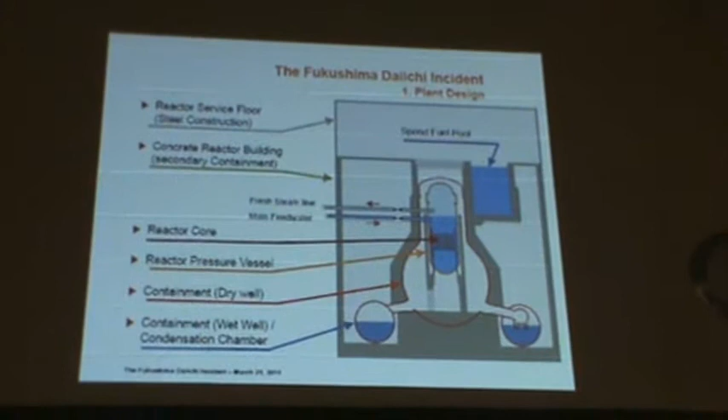I'm going to quickly go through some of the boring stuff here, but this is basically what the Fukushima plant looks like. It's also very similar to the Susquehanna plant, the 2-unit boiling water reactor up near Berwick that I work to support. It's also similar to the Limerick plant - if you go down Route 100 you'll go right past it in Limerick, Pennsylvania. Also on the Delaware Bay there's the Hope Creek plant, very similar in design to this.

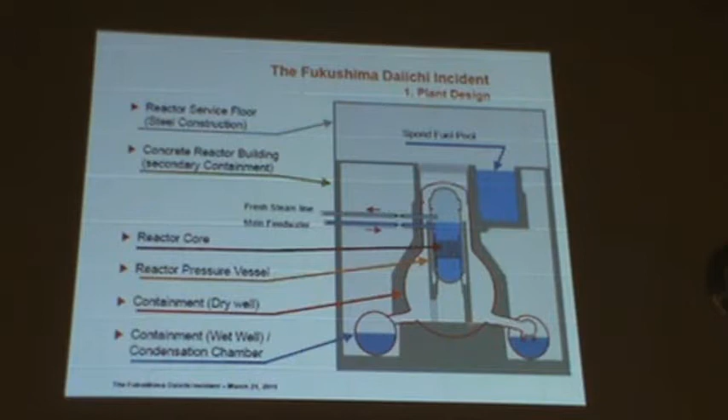We've got the reactor core sitting inside of a pot that's inside of a thick-walled steel reactor vessel that contains all the water surrounding the core, and it's enclosed inside of a concrete and steel containment structure. This is just to illustrate that there are multiple barriers between the core, where all the uranium is, and the outside world. We've got multiple barriers and multiple ways of getting water into the core here. I'm expecting you all to take good notes, there's a lot to get through, so save your questions for later.

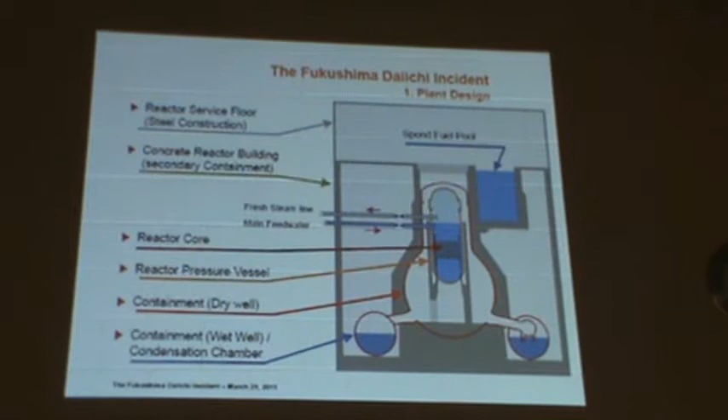Okay, Paul? All right, fission is what we live for. The uranium atom is sitting there minding its own business, perfectly fine.

You can pick up a new fuel rod, and you can handle this stuff, no problem at all. Until along comes a speeding neutron.

You may recall that the atom nucleus consists of neutrons, which are the gray dots, and the red dots here are protons. It's all kind of held together in this great big mass of protons and neutrons. The number 235 means there's 235 of them in there.

It sucks up one more neutron, becomes uranium-236, and becomes unstable and busts into two smaller products we call daughter products, because they reproduce themselves. They will continue to decay and produce more and more products, but these are the leftover chunks of matter after you get the fission here.

Well, the other thing that happens when you have a fission, which is what you call it when an atom breaks apart, is it liberates a couple more neutrons. And if you're not careful, or if you're designing it that way, you can see what happens. One neutron then becomes two neutrons, and two neutrons encounter two uranium atoms, and if you allow that to progress geometrically, you can have quite an interesting result. The way we design our cores, this doesn't happen.

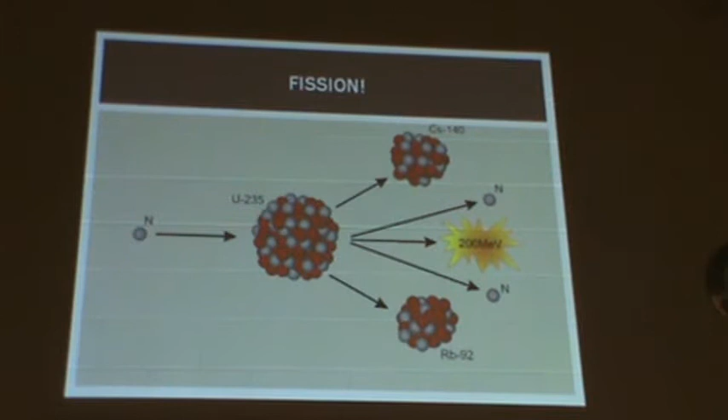Okay, Paul? Okay, this is a fuel pellet. Like I said, you can handle a new fuel pellet. This is a fuel pellet in production. It's all the size that an individual pellet is. It's just a tiny little thing.

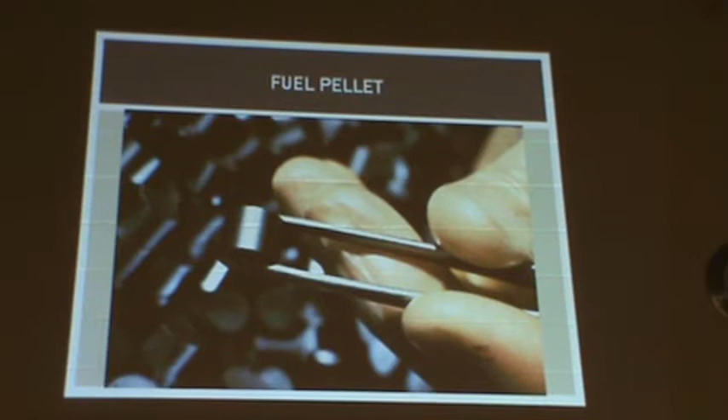Then we take these things, we stack them up inside of tubes, and this is a typical fuel bundle for a boiling water reactor. This shows 4 of them here, and one is cut away in this diagram. Each of them has a series of tubes that are all held together in parallel inside the core. Each of these tubes is just a stack of those pellets that we saw a second ago.

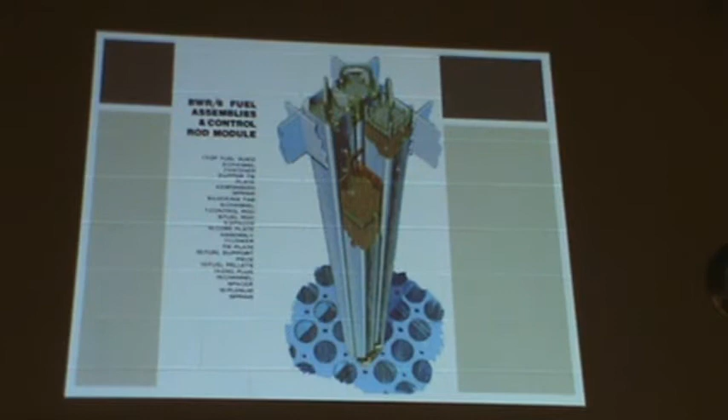And in the Susquehanna core, there's 764 of these bundles. Each of the bundles is a 10 by 10 array, and it's about 14, 15 feet long. So that's how much raw uranium and other stuff is in there in terms of pellets. So that's what we're dealing with.

This is, Paul said, I've spent much of the last month looking down into the reactor. This is what I saw. You're looking down here at the reactor core itself.

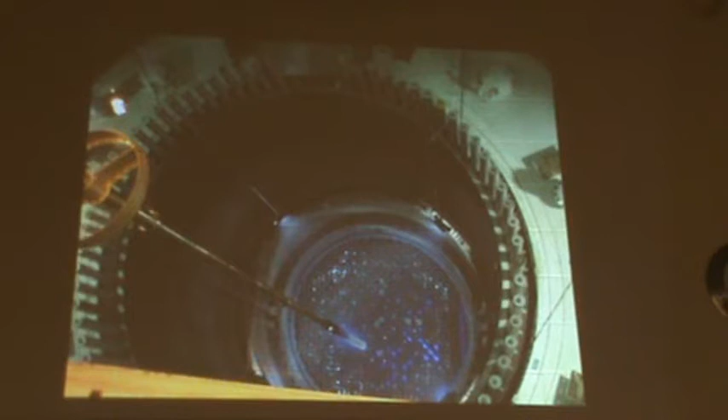All right, this is a used fuel bundle, and it's being pulled up and taken out of the core and put into the spent fuel pool for long-term storage. So it's got this beautiful blue glow. That's called Cherenkov radiation, and that's where you're actually seeing the light given off by one of those electrons shooting out from the core. It's actually slowing down while encountering the water surrounding it, and in the action of slowing down, it gives off this beautiful blue glow. So that's not a light down there, that's the actual core itself glowing that way. So when you talk about nuclear glow, that's it.

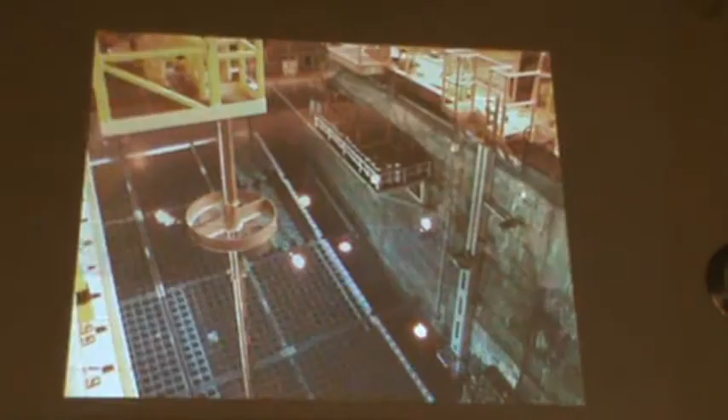Okay, next, this is a spent fuel pool. They pick that bundle up, haul it over, and set it down in this array, sort of an egg carton kind of thing, maybe more like a beer case. You're just setting it down in there. This whole pool is probably about half the size of this room. If you divide this room in half, this whole thing here would fill us up, and it's all full of water.

Okay, next, all right, this is the Fukushima plant in Japan. This is how it was prior to March of last spring. It has 4 units here, 1, 2, 3, and 4 along there, and there's actually 2 more over here, 5 and 6. So it's right on the coast, and you can see it's got this setup with some breakwaters out there.

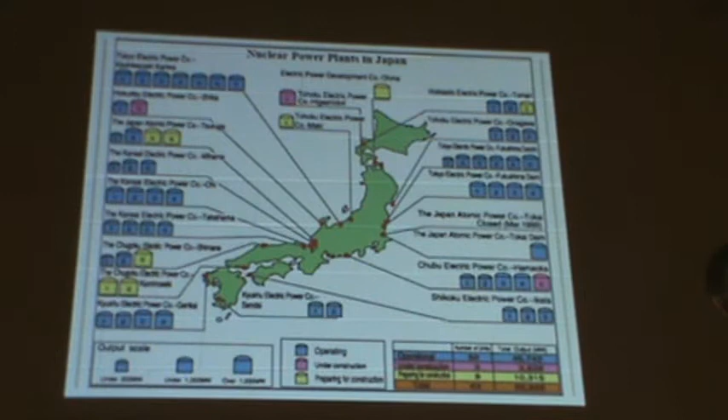It is just some of a large number of nuclear plants in Japan. Japan had gone very much for nuclear power. They have no natural resources of their own for which to generate electricity - no oil, no coal, maybe a little geothermal, but not enough to really make much of a difference for them. So they had launched onto a program of building nuclear plants, and they're all around the island.

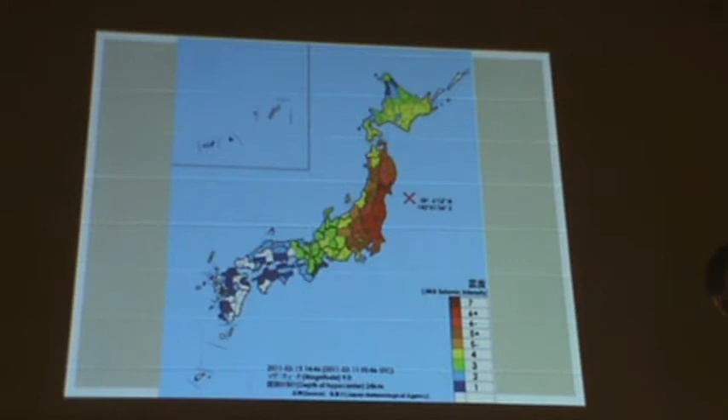All right, so this is where the earthquake occurred. It's the largest earthquake at a Category 9 on the Richter scale, and the color grade shows just what areas are most affected. The Fukushima plants are right down in this area, right here. Couldn't be much closer. So you had a huge earthquake that occurred on this day, and it was devastating to the countryside.

All right, so 11 reactors automatically shut down. In Japan, you have an earthquake, boom, down they go, because they expect earthquakes to happen, and they'll have an emergency shutdown. Again, if you take emergency shutdown, you shut down quickly - do you go to zero in power inside the core? No, you haven't stopped heat production, so you've got to keep pulling that heat away from there.

There were another 3 that were affected in that area that were already shut down. There were 3 of the Fukushima plants, units 4, 5, and 6, were not operating at the time - they were shut down. I've talked to some of the people that were there at the time. The earthquake happened, and they got out of the plant, and they had 2 places they could have gone to - one was their hotel, and one was a closer hotel that happened to be up on a hill. They decided to go to the closer hotel. The hotel they were in didn't last very long.

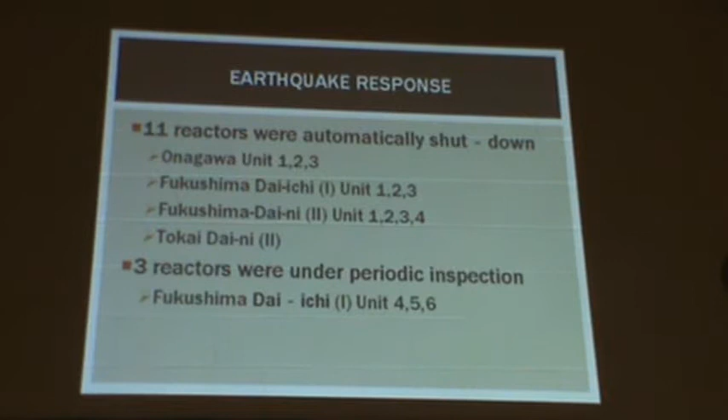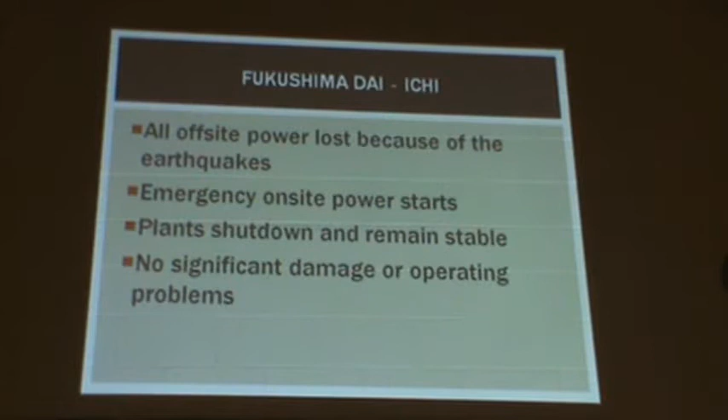All right, so they lost all off-site power. We're designed to be able to take that. If power to the grid goes away, like it happened here locally last October, we have emergency on-site power - a set of emergency diesel generators, basically a diesel locomotive sitting there ready to produce electric power for you. They start up right away and provide the house loads to the essential things to keep that heat being removed from the core. They started up just fine, and the plants were shut down and were stable. There was no significant damage. They hadn't actually walked through the plants, but they shut down as expected, and they were stable and operating in a shutdown state. This is after that huge earthquake.

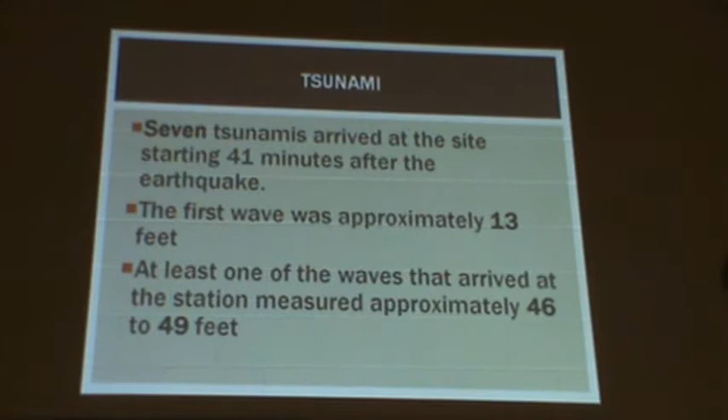41 minutes after, the first of 7 tsunamis hit the site. The first one was approximately 13 feet, and it was blocked by that seawall you saw out there. They can measure that - they have a little tide gauge. At least one of the waves that arrived at the station was 46 to 49 feet. The only way they knew that was they could see the water level marks on the side of the building, because their instrumentation that measured this 13 feet was gone. They were designed for 18.7 feet - that's what they were designed and licensed for.

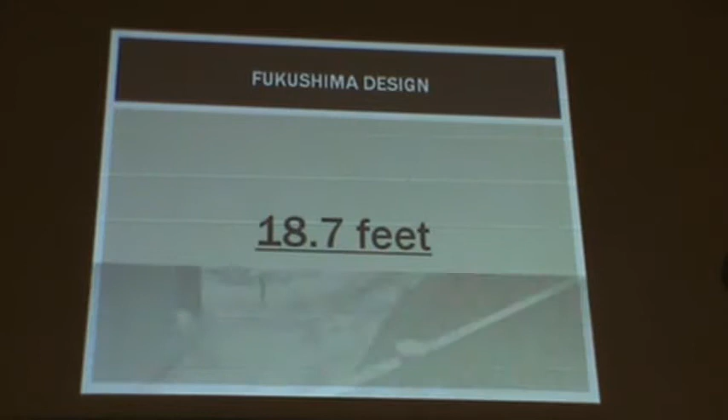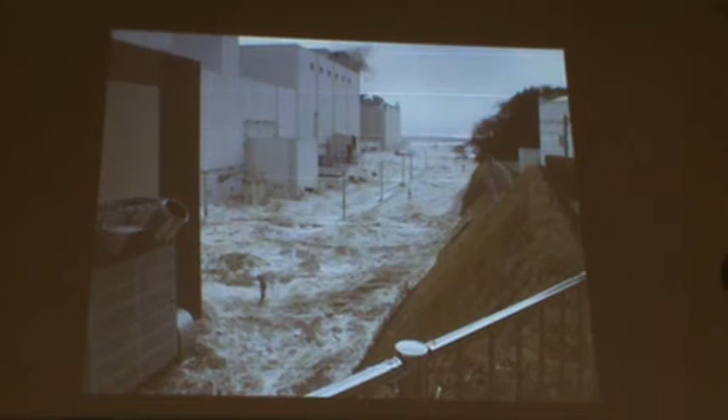This is what it looked like as the tsunami came rolling in. Here's some of those buildings that we saw in the overhead shots. This might be a little tough to see, but it's a good illustration.

You've got the ocean out here, the tidal wave comes in. This is where the reactor is, called the reactor building, naturally. The reactor produces steam, which goes through a turbine, and that's housed in the turbine building.

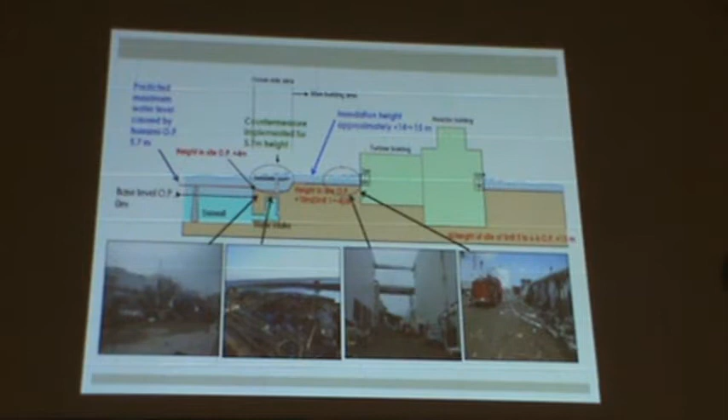You've got to use your imagination, now you're looking at it from the other direction. The ocean is out here, and now you're looking inside the plant. This is the water level here, and here's that reactor we saw in the earlier picture.

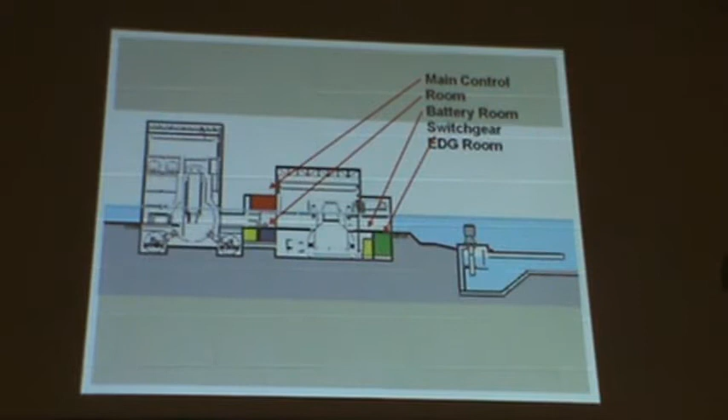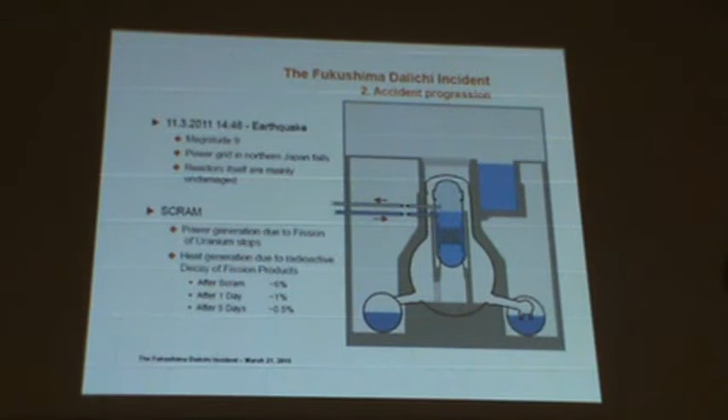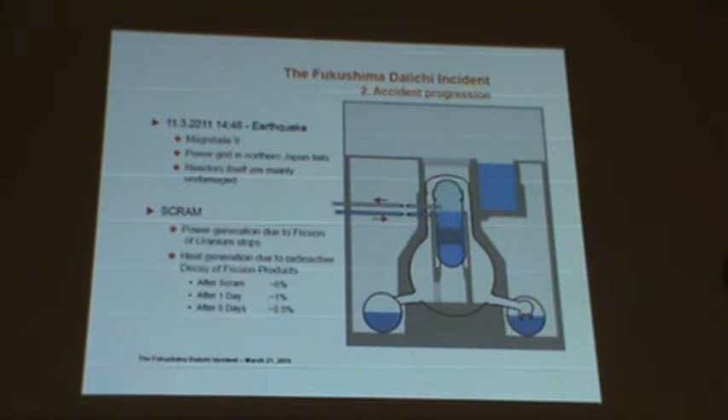If you blow steam into water, the water is going to cool off the steam and it's going to condense, and it keeps the pressure down inside of this, which is kind of like an upside down light bulb - not a curly fry light bulb, but one of the classic light bulbs. Up here is the spent fuel pool - that's what we saw the picture of.

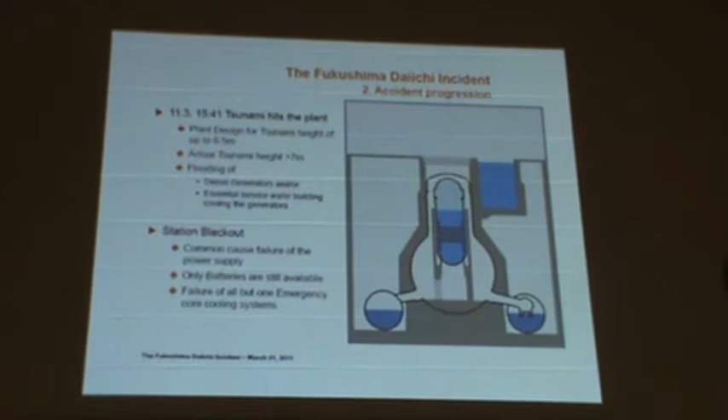So the tsunami comes, you lose the diesels, and now all of a sudden you have no makeup water coming in here. How much power is being produced in there? Roughly 6% of the original. So we're getting hot, and this is all bottled up. If you've got heat in a bottled-up enclosure, pressure starts going up.

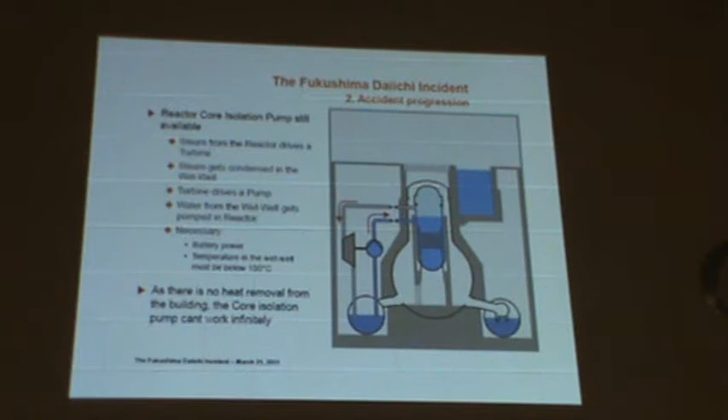So we've got to deal with that. There was a system that can operate off of the batteries that actually takes steam off of the top of the core, and there is steam being produced. It drives its own little turbine and drives a little pump, and it circulates around in here. So it has a self-contained system, and that was fine as long as you have batteries.

Well, as we saw, the batteries didn't last very long. So here we are, back to a hot core and nothing coming in. So what happens here? Well, you start building up pressure, and you've got to get rid of that pressure.

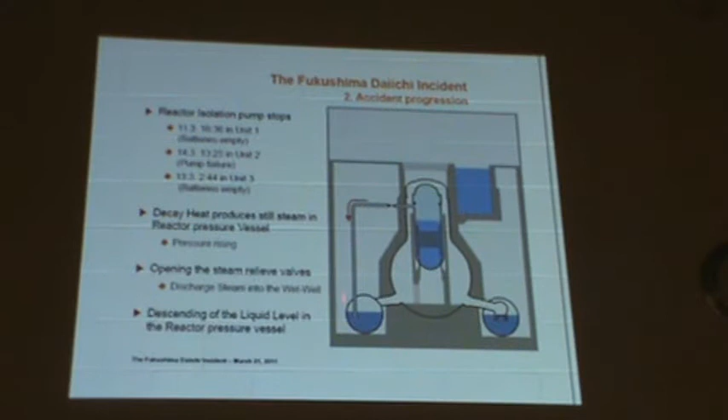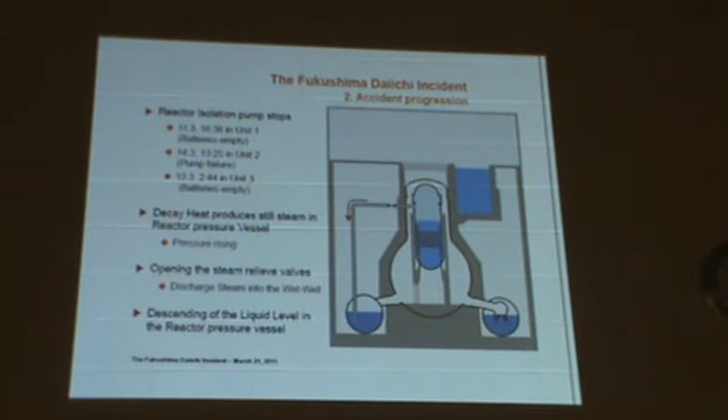So they open up what you'd call a relief valve, and it directs steam down into the suppression pool - this big donut down there that's half full of water - and they're just coping now. They're directing the steam down in here, and we're losing inventory because steam is coming up, but no water is coming back in.

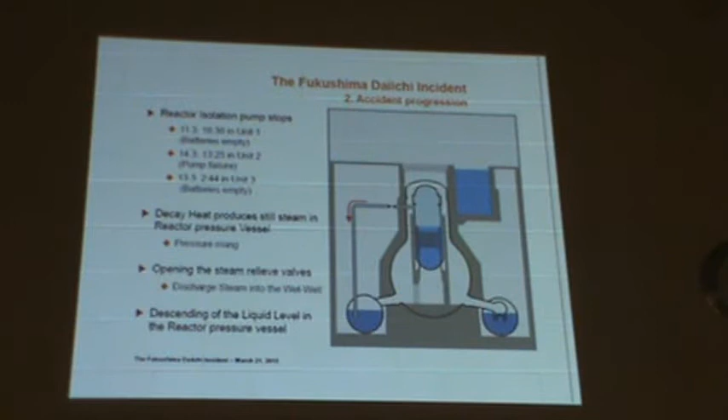So now we're down to the top of the fuel. We keep on going, and what do you suppose is going to start happening to that fuel? It's going to get hot and melt. It starts getting hot.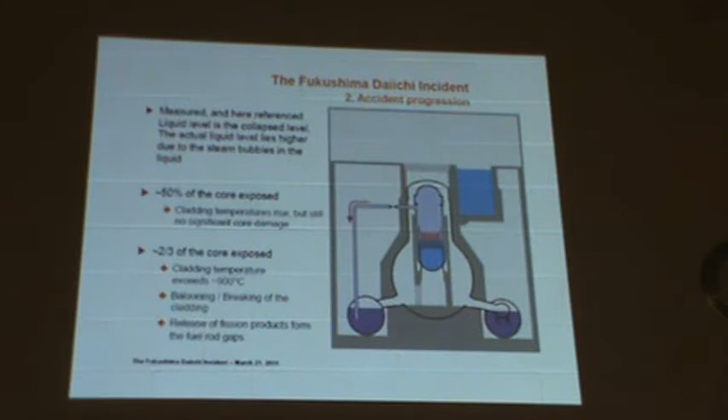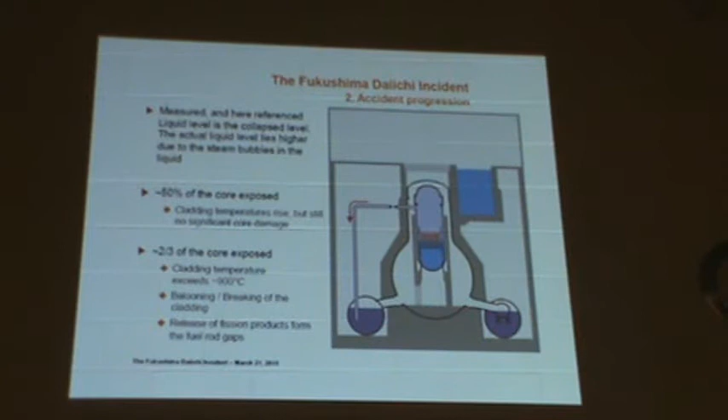Now there's one thing I mentioned about those little fuel pellets - they're inside of a tube. That tube is a zirconium alloy that is great for producing power, and as long as it stays cool, we're great. But when it starts getting really hot, when it gets uncovered, the water that comes in contact with it will actually burn - it takes the oxygen out of the water, H2O, and forms a zirconium oxide layer.

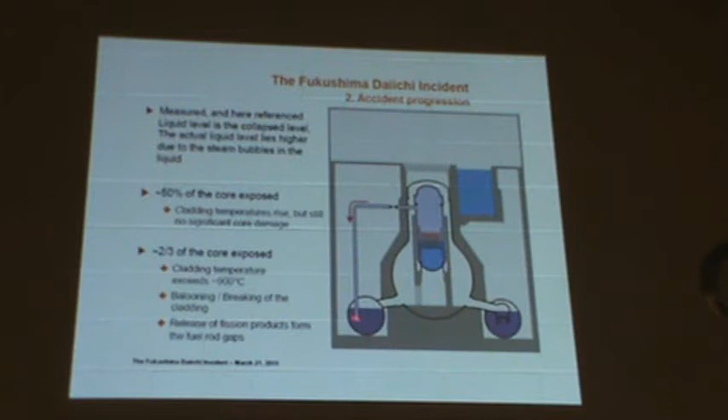And what happens when you take the oxygen away from the water? What do you get? Hydrogen. Hydrogen starts accumulating in here, and it's getting directed down into the pot here. Does it condense in there? Does it stay in? No, it'll just come bubbling back up and be in this area. Okay, so that's the problem.

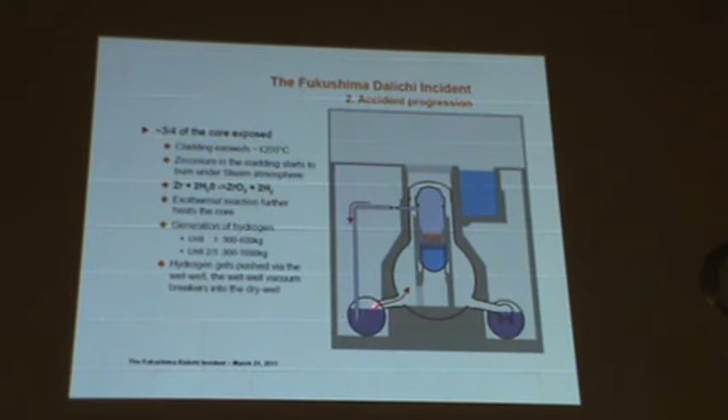And the other thing is, remember those daughter product things I told you about? Some of them are solid, some of them are gas, and the gaseous parts are now starting to get released out here. So you've got all these daughter product things bouncing around, and the steam is carrying some of the particle parts also. So that's coming down in here, and the gaseous stuff is bubbling back up and coming in here. So this whole thing is getting full of hydrogen and these radioactive particles that are supposed to stay inside the core.

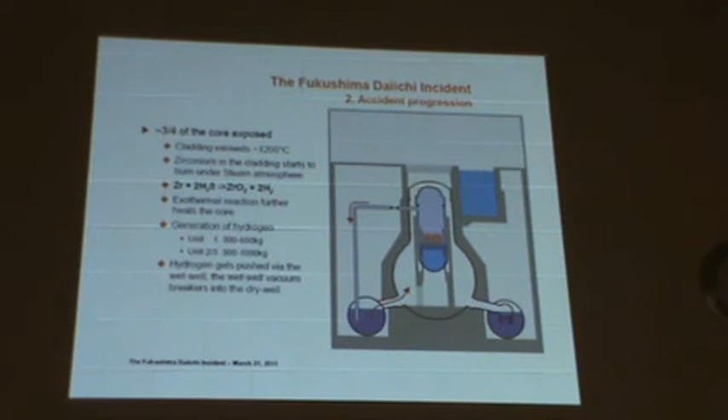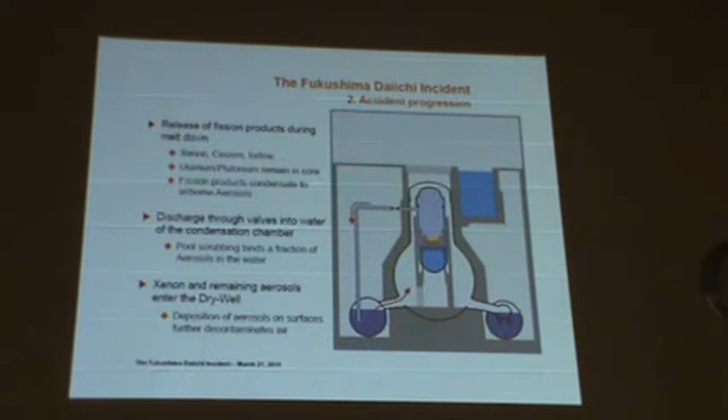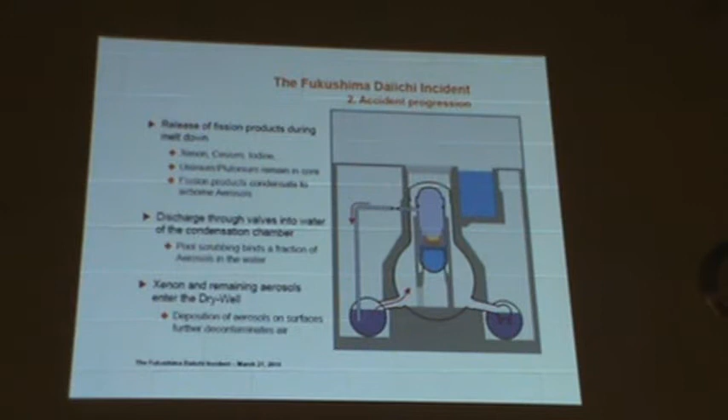Okay, next. Getting hotter, and more of these particulates are accumulating here. The guys in the control room, and I'll tell you what they were going through in a minute, but they're seeing not only is this pressure going up, but now the light bulb is going up in pressure. You got to do something, otherwise it's going to bust.

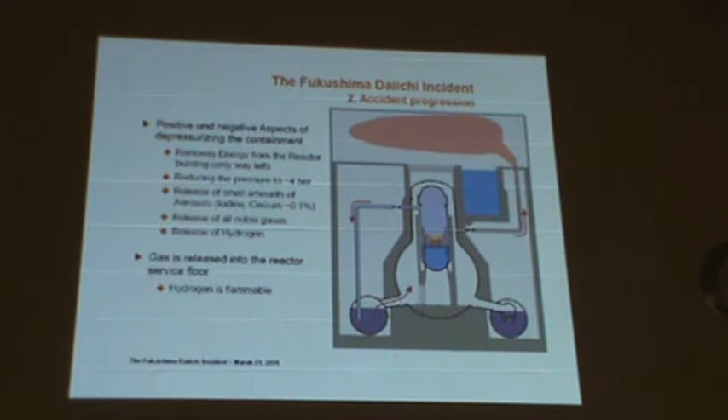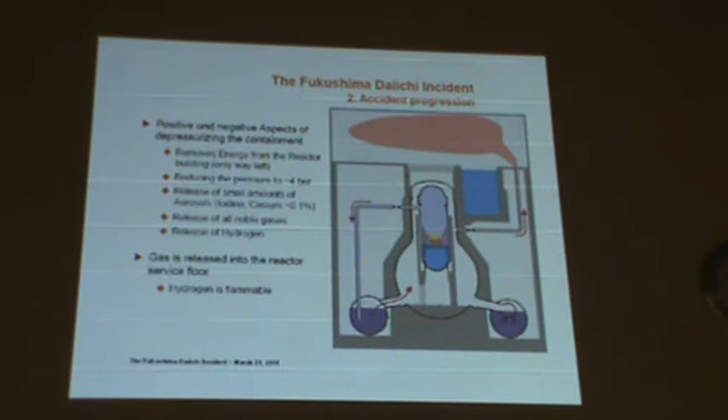Okay, go on. So they open up a vent from the light bulb, and they vented it up into this space up here. Now that space up above is, again, where I spent much of my last month. It's a big old open area that has the machinery for moving the fuel around that we saw in those pictures. Nothing else much up there other than the spent fuel pool is open to that. But now they've released all this gaseous stuff, which includes hydrogen and the radioactive particles, and it's all up in that area, okay?

So you release hydrogen up into an area that's got oxygen, wow, bammo, you get an explosive mixture. Okay, so this is what everybody saw on TV, and this was the result. We got some pictures up here if you want to look later on. I actually flew some drones over the top and could look down inside.

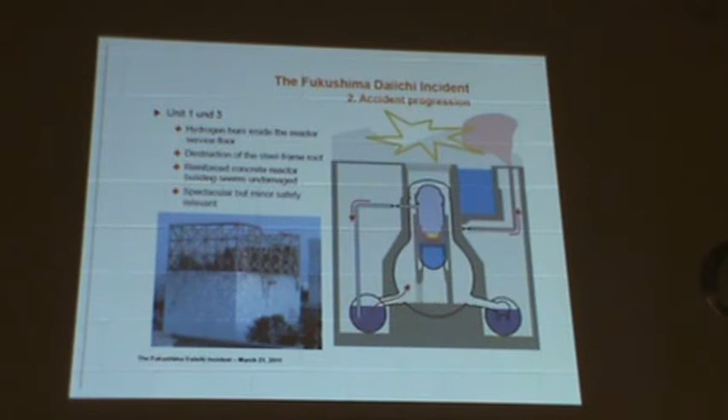Now, anybody tell me what didn't explode here? The core didn't explode. The vessel didn't explode. The primary containment light bulb didn't explode. It was this big open area up top that exploded. A bunch of junk fell down inside. There's stuff that fell into the spent fuel pool. Not a good situation, but that core is still inside of the vessel, which is still inside of the containment structure. We just have this, we have a vent here. Again, not good, but this is remaining largely intact.

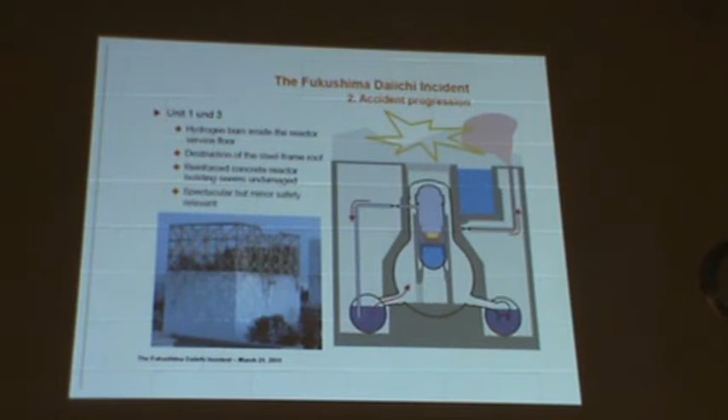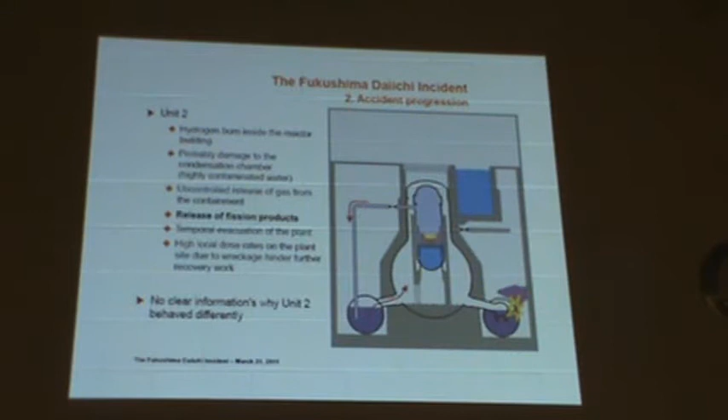There was some thought about one of the units, unit number 2, that the little donut thing had ruptured, and from this presentation that I got a little while ago, that was still the operating thought. Recently, in the last couple of weeks, they actually sent a robot into this area, and it went all the way around the donut there and found that it was fully intact. So they're trying to explain why there was a big noise there, but there were explosions going on next door, so that's probably what they were hearing. So if you hear that one of the vessels or one of the containment structures ruptured, that is not true. So this did not happen.

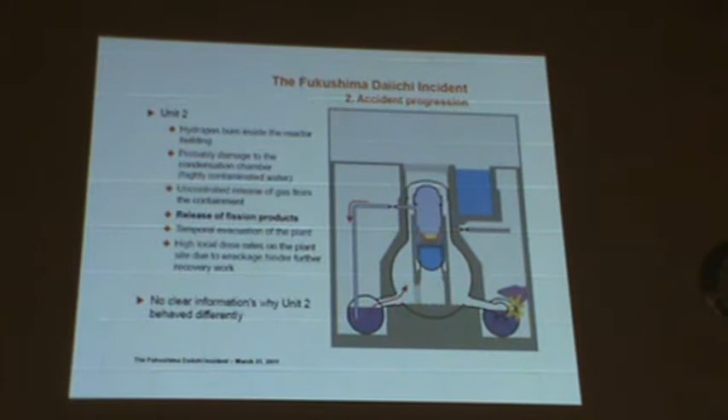All right, next. Eventually they did manage to get power back, and they brought in fire trucks. They brought in all kinds of things and pumped in seawater and managed to get the pressure down and get water back in. So that's the current state now. It has been recovered and it has been cooled, and the operators do believe that they've got things under control now.

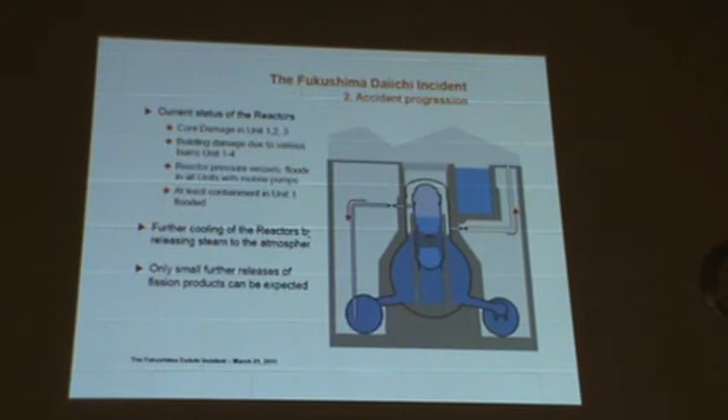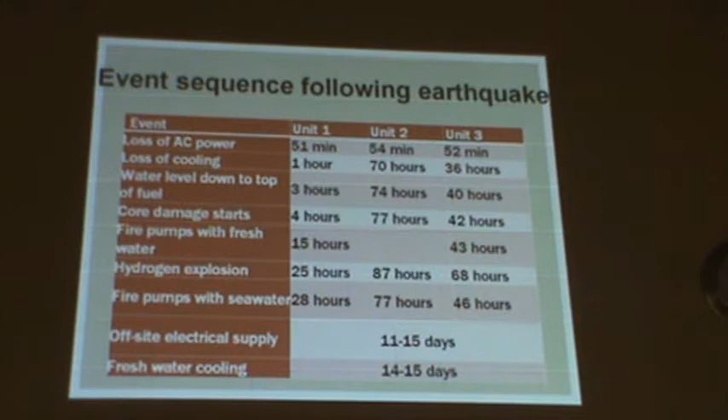All right, this is just kind of a timeline showing the three operating units, how long it took for loss of power. It all happened about the same time. Core damage started in Unit 1 at 4 hours, Unit 2 at 77 hours, Unit 3 at 42 hours. They all had their own reasons why it took much longer in some than others. Fire pumps came in with fresh water at 15 hours here, 43 hours there. Again, just a matter of how you got in there and what you could do. Hydrogen explosions happened at these different times. Off-site electrical supply came back anywhere from 11 to 15 days. So they lived without electric power for darn near 2 weeks.

You also have heard about that spent fuel pool, again up at the top there, that there was damage up there, and that's also something that they found now is not the case.

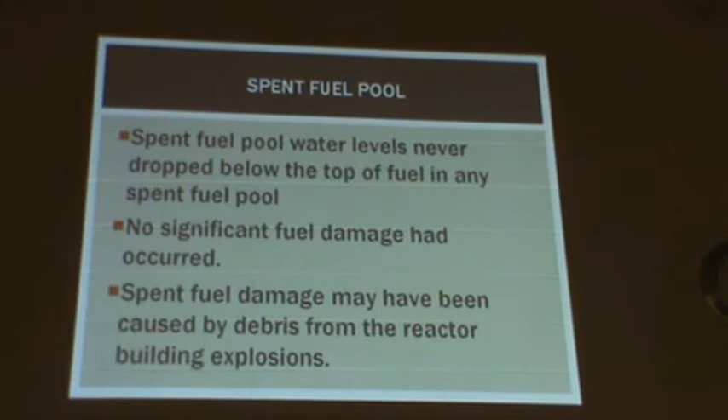Fuel pool water levels never dropped below the top of the fuel in the spent fuel pool. The fuel was still hot, so you had to keep water on it. Thanks to fire trucks and having the lid blown off, they were able to keep water over that large spent fuel pool, so no significant fuel damage really occurred. There may have been some damage when the roof caved in, but it was impact damage, not overheating.

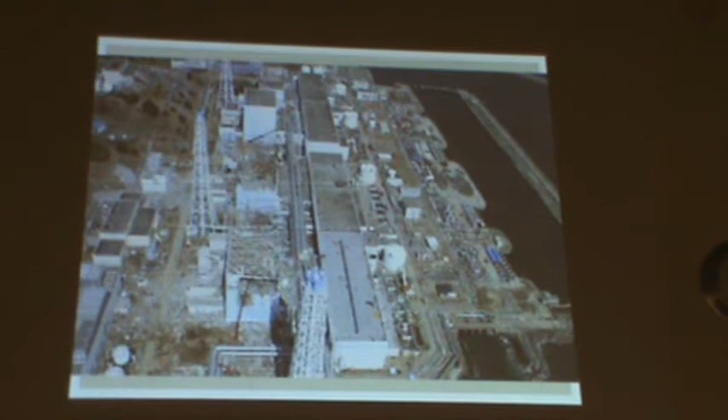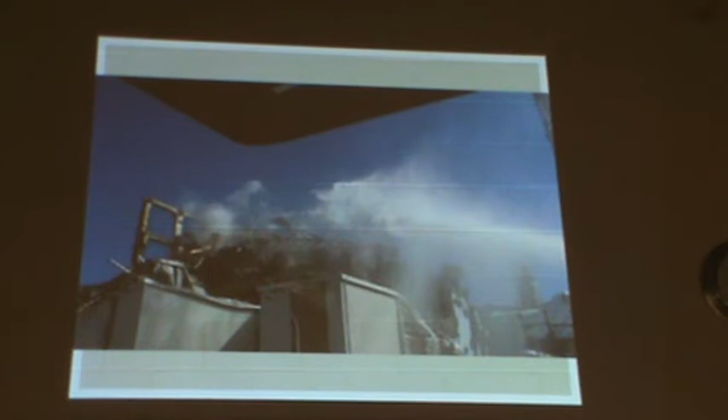I told you about getting water into a spent fuel pool. Here you've got the lid blown off of the reactor building, that big open area at the top, and here's a fire truck squirting water up there. They're just dumping water in any way they can. They also had cement pumpers - if you ever wonder how you get cement up in a real high area, they've got pumper trucks that will pump that stuff up, and that's what they used here as well.

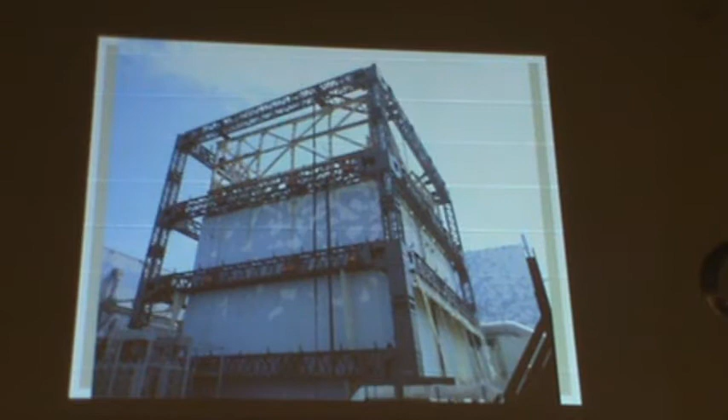What they're doing now is building a sarcophagus around it. They actually built this structure around each of the damaged units, and they're putting up these panels. You can see them lifting it into place here, and they're enclosing it so it's not open to the environment any longer. You can see here it's almost done, and they're putting a lid on it as well.

You can imagine you are the plant operator. There's dozens of operators, but the control room operator, the team of people in charge of keeping things running and keeping that core covered, they're in here and all lights are out. All you have is some emergency lights, and those don't last long either. They're wondering, what do we do?

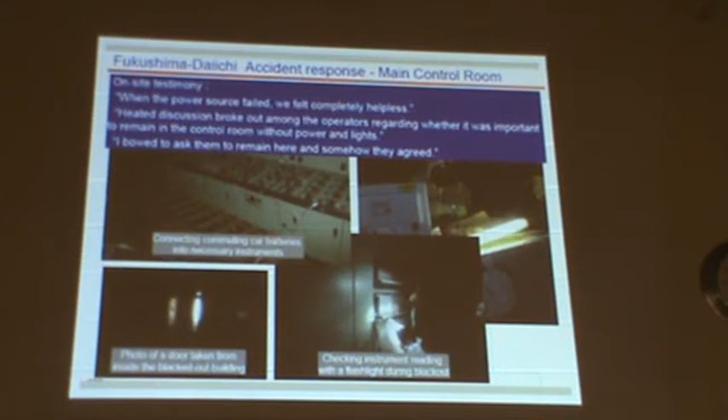This is an interesting quote from somebody's testimony from the control room: 'When the power source failed, we felt completely helpless. Heated discussion broke out among the operators regarding whether it was important to remain in the control room without power and lights. I bowed to ask them to remain here, and somehow they agreed.'

All right, releases. Who was here for the Three Mile Island accident? Not a pleasant time. Well, there were releases from Three Mile Island, and don't worry about the units, but 481,000 terabecquerels. Fukushima, four damaged units, 630,000. Chernobyl, 5,200,000.

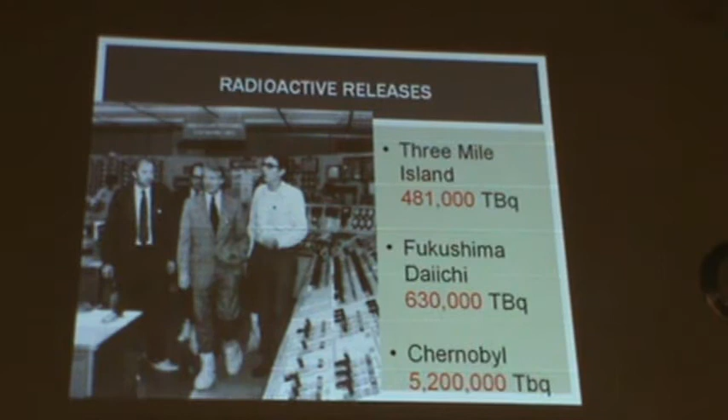So if we put it in a little bit of perspective, yeah, a bit more than Three Mile Island. Anything that really happened from Three Mile Island, health-wise? No, not really. So this is maybe 20% more or so, but not dramatically higher. And you saw the guy with the boots on.

All right. You and I and everybody across the fruited plain get approximately 3.1 millisievert, whatever that unit means, of radiation just from living. If you live in Denver, you might have 5. If you live in Rhode Island, you might have 2. It depends a lot on where you live, and your basement is like here. Well, and yeah, if you live in the Reading Prong, you may be 10. But it's highly variable, and we all live with it.

So they checked 10,000 people living near the Fukushima plant, and more than half of them got less than 1 out of the whole deal. 4,000 some got between 1 and 10, and a few got a bit more, but still nothing really dramatic as far as exposure to the general public.

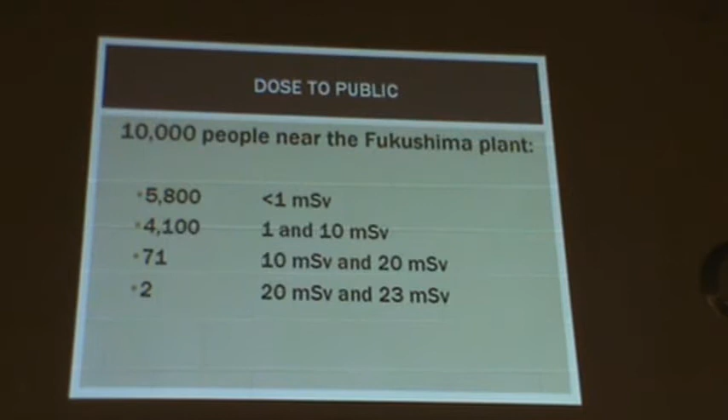So, what are the consequences? A 0.002% increased risk of cancer, and a 0.001% increased risk of death from cancer as a result of these releases. So, after all that, other than Chernobyl, I can't think of a worse thing to do to a nuclear plant.

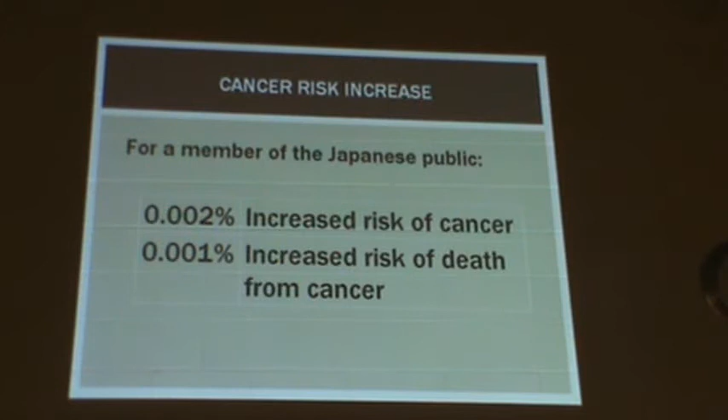After all that, here's our total consequence. Of course we have to express it in terms of percent of risk because you never know. If you have 10,000 people, you might be one person out of that 10,000 that succumbs to cancer because of it. There's no way of knowing, because there's potentially a great many of them, so you're just increasing the odds. The biggest health risk is obviously the psychological trauma and evacuation, and you're months away from home.

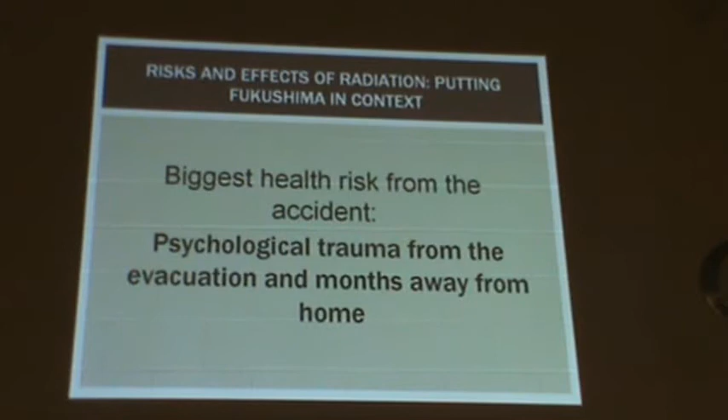This is really devastating to most of the people. There are vast areas that are not inhabitable right now. You can't go back. There are some areas that they're letting people come back to, and some that you can't. A large part of why there was so little exposure was that they did have time to evacuate. And if you can imagine, you're dealing with a tsunami, in the aftermath of a tsunami, and you've got to get all these people out. They were able to do it.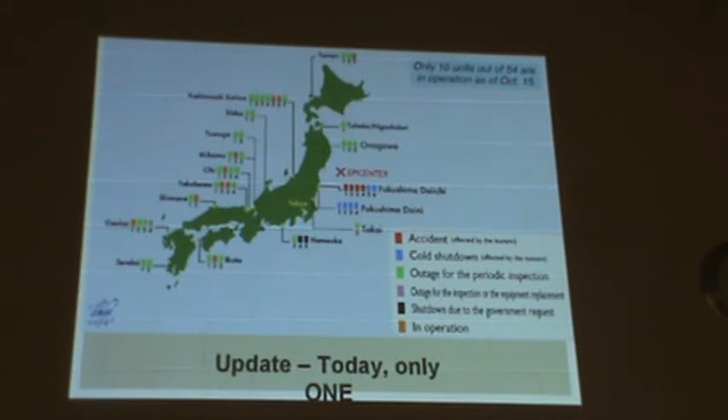All right, so what's happened in Japan? Well, again, you remember that map I showed you with all the nuclear plants? Last October, there were 10 operating units. The other day when I made up this slide, there was one. News is, tomorrow that one's shutting down. They will have zero operating nuclear plants in Japan. It's hard to fault them, but they're not tearing them down yet, so give them a little time. They have to make it up with natural gas and oil, so they have to deal with that.

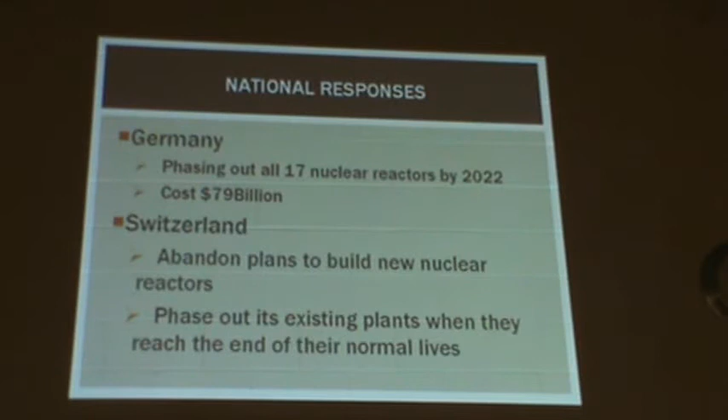Well, what about Germany? They're phasing out all 17 nuclear reactors by 2022, replacing them with windmills. Come on. Windmills. They're spending $79 billion. Switzerland said they don't want to build any more. Fine, and they're going to phase out the existing ones when their operating lives run out. That's a couple of years away.

France is an interesting story. They're going to continue operating. They've got 58 nuclear plants and 2 under construction. They just had a presidential election, first round. They had a Greens candidate who made a big deal about shutting down all nuclear, Eva Joly. She wanted them all shut down, and she was all over the news. She got 2.3% of the vote. The other two candidates, the Christian Democrat and Socialist, are both pro-nuclear. So even if the Socialist gets in, they stay in, lots of jobs.

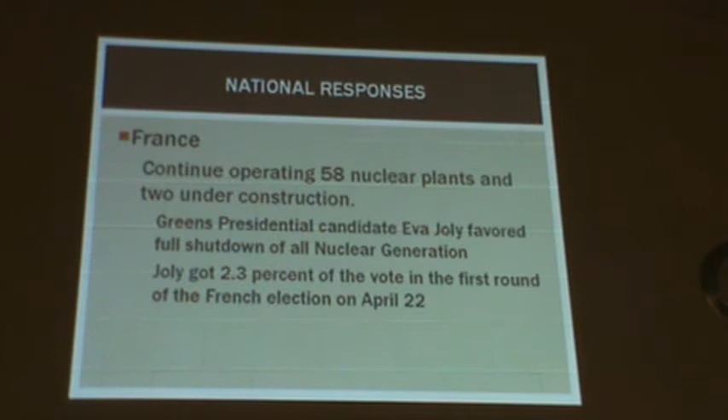Here in the USA, we're continuing to operate. They've actually licensed the first new plant construction in 30 years, the Vogtle plant down in Georgia. Doesn't mean it's going to get built, but they're starting today.

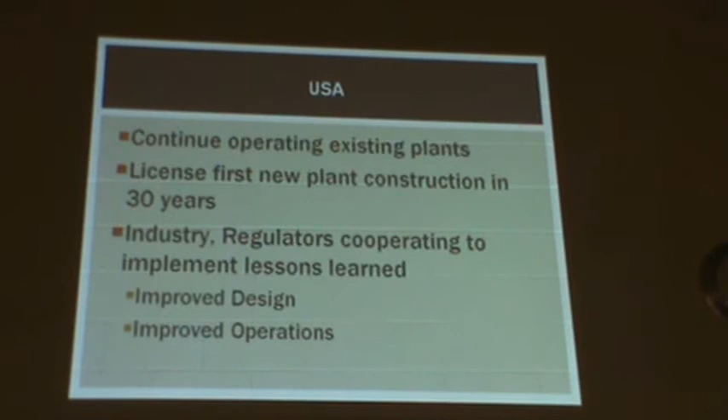The environmentalists still have something to say. The industry and regulators are working together. Everybody recognizes something's got to change. There's some design things that we can do that I'll be involved with, and there's things that operators will learn from, lessons learned. There's a lot of good things that are going to come out of it, just like after Three Mile Island, the plants are vastly better after that.

So you ask your average environmentalist, oh no nuclear, no nuclear. But nuclear generated electricity avoids almost 650 million metric tons of carbon dioxide per year in the U.S. If carbon dioxide is going to kill us all and the polar bears, why are we doing this? Why not? If they were really serious about shutting down CO2 emissions...

Windmills are not going to cut it, I'm sorry. Solar panels, you can shine that light on a solar panel for a while and generate some electricity with it. That'll help, right? But unless you all want to go to bed with the chickens, solar is not going to help you much.

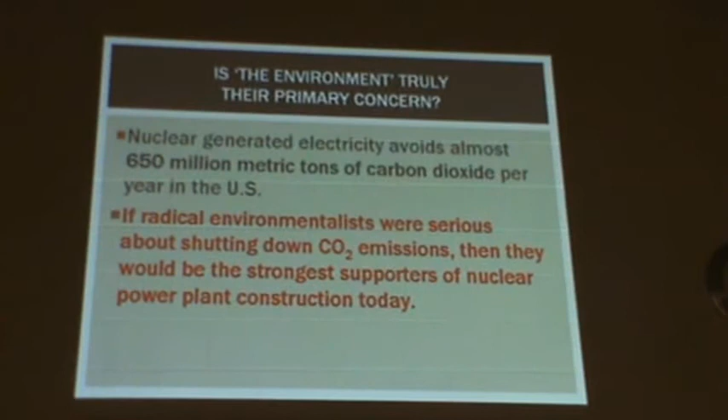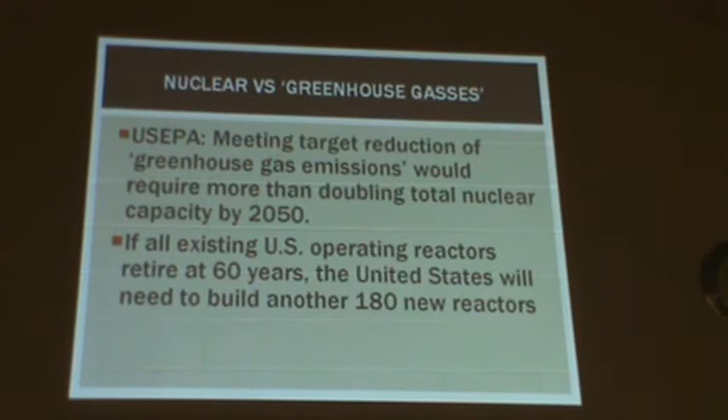The EPA has a target for reducing carbon emissions. If they want to meet it, they're going to need to double total nuclear capacity by 2050. And these plants, we're extending their lives. Right now we've got a 60-year lifespan for most of our plants. If we don't extend them any further, then we're going to need another 180 nuclear reactors to replace those and to displace the evil carbon.

Again, I mentioned our plants are very safe. We have what we call a defense in depth philosophy. I showed you the multiple barriers. You've got the pellet that contains those little nasty fission products. You've got the tube that they're in. You've got the water around it. You've got the reactor vessel itself. You've got the containment structure. So we've got all those different barriers between the core and the environment.

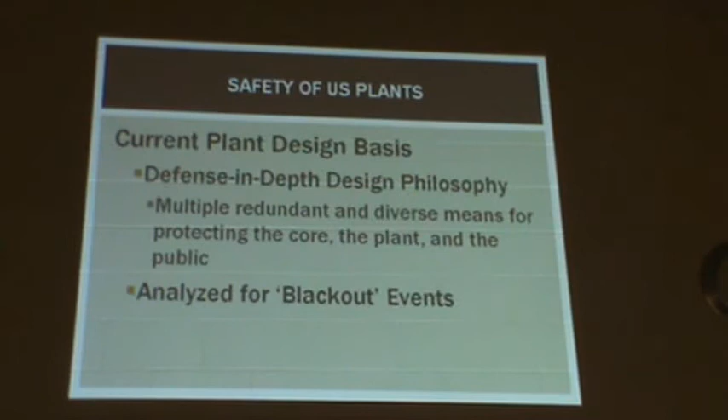We are analyzed for what we call blackout events, no AC power. There's no way that we can live as long as they did without having some of the same effects, but we have a coping strategy for a number of hours, and that's one thing that's certainly going to change. We're going to have to extend that. So we're going to need a football stadium full of batteries, I don't know.

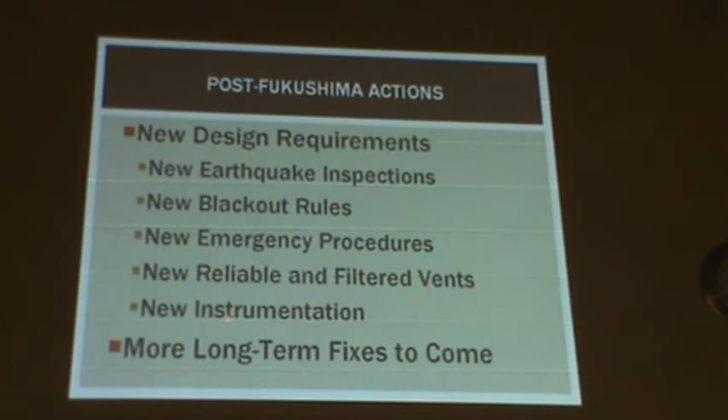One of the things we're doing right now is new inspections, new rules for coping with blackouts, emergency procedures. I'm part of an emergency plan - if something should happen at the Susquehanna plant, my pager is going to go off and I'm out of here, up to the emergency response facility. New reliable and filtered vents and some new instrumentation to help us cope with the events as they're happening under these stressful situations. And there's long-term fixes to come, they're still working it out.

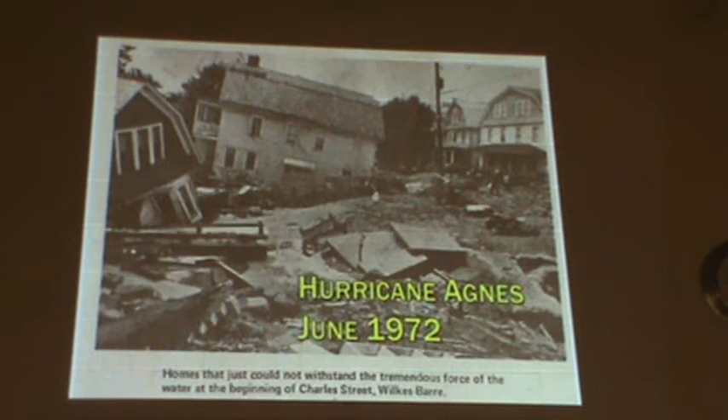Who remembers Hurricane Agnes? The plant was still in the planning stage, and it put that site under several feet of water. If we had put our diesels down there, we would have lost the diesels and the fuel tanks and everything else. So Agnes comes along, they said, hey look, we got this hill up here. So they put it up on top of the hill, and it's worked fine.

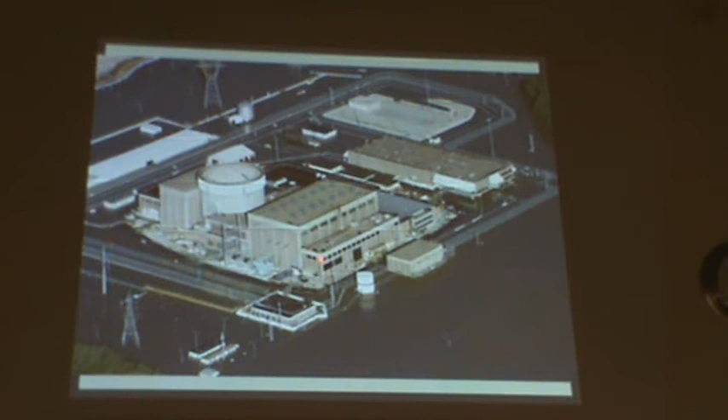Last summer, flooding on the Missouri River, Fort Calhoun plant, look at this. Here's the river, here's the plant, surrounded by water. It came darn close to flooding itself. This was right here in Nebraska. So this plant was operating on its emergency diesels. It operated on those diesels for months.

It's something we've got to look at, something we've got to deal with. So the tsunami consequence - as of last October, the count was about 16,000 people confirmed dead, 4,000 missing, so call it 20,000 people. 500,000 residences are damaged or destroyed. 4 million homes lost electricity, and the total area inundated by the tsunami was about 217 square miles.

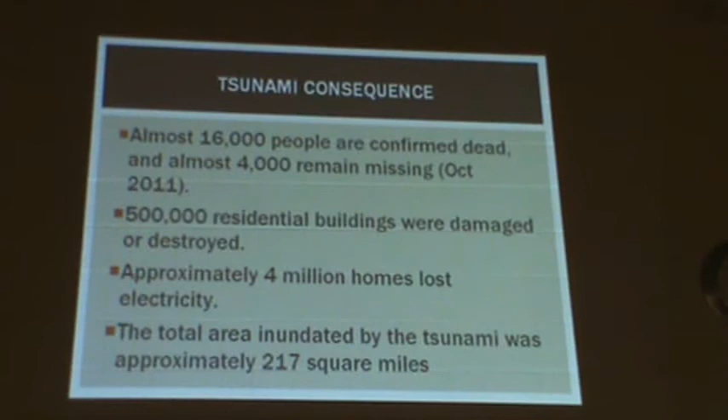So what can we do? We need to protect from tsunamis if you're in Japan, if you're on the coast of the U.S. There's plants on the east coast of the U.S. They're not immune.

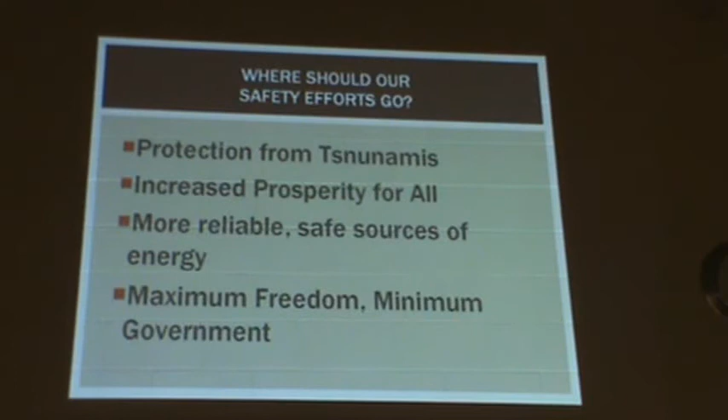The best way to build something better is to have a prosperous economy, not by dragging us down, and by having reliable, safe energy. That's the way that we progress, and the more we progress, the safer we are. We need the freedom, and obviously appropriate regulation and government involvement, but we need to be able to do what we can. I think there's a great future for nuclear in this country, and I think that's it.